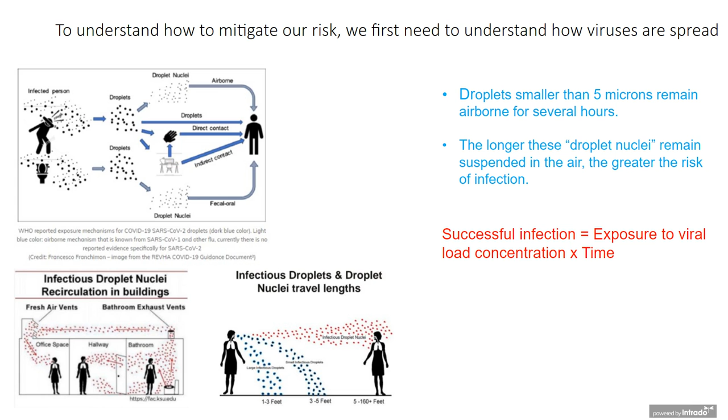So furthermore, how do we address PM2.5? We need to understand the importance of it. We started with the virus, now we have to talk about PM2.5.

As I mentioned, the virus itself is between 5 micron down to 0.125 micron in size. Just to give you a snapshot of what that means, human hair is about 50 to 70 micron in size, and beach sand is about 90 micron.

PM2.5 is indeed the unseen dangers. These are particles we can't see, but they present significant inhalation effects and attribute to chronic disease such as asthma, heart attacks, bronchitis, and respiratory problems. Those with underlying conditions have a bigger impact from it. Somebody who has asthma or an elderly person dealing with respiratory issues already will be affected much more severely by PM2.5 than a healthy individual.

Furthermore, exposure to PM2.5 itself has been linked to higher COVID-19 infection and mortality rates, right off of the NIH website. So again, we have to address the air we breathe holistically. From the virus standpoint, which goes far beyond COVID-19, we're looking at influenza, bacteria, mold, fungus spores. There's a lot going on in the air, and it has to be addressed.

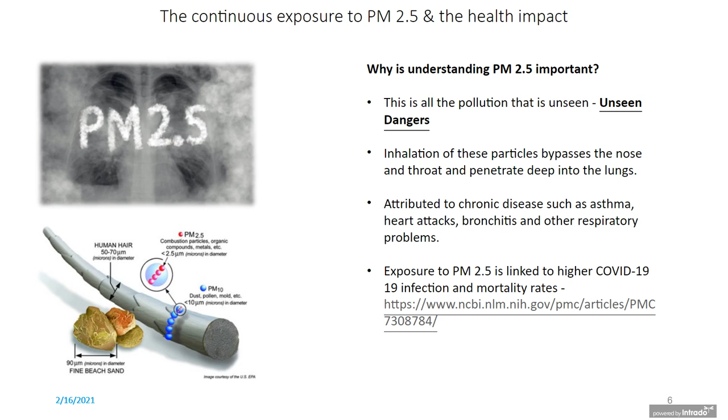So what I want to talk about is really the global burden of disease and how it attributes to indoor air pollution. Studies performed well before this pandemic, back in 2015, directly linked the global burden of disease to ambient air pollution, both outdoors and indoors.

And then during the pandemic, which we're still in, Dr. Chan from Harvard wrote an article linking air pollution to higher COVID-19 death rates. We have to look at the facts. We look at New York as being the epicenter. Why? A lot of different reasons, but one of them is the air they breathe, both outdoors and indoors, is extremely polluted. And you don't know it.

You could be a healthy individual, exercising every day, going out for a run or a bike ride, but you're only as healthy as the air you breathe. So if you're getting in contact with this PM2.5 consistently, the cumulative effects of that exposure will degrade your health over time. In fact, over 7 million people die prematurely every year from air pollution, both household and outdoor.

Of that 7 million, 300,000 is right here in the United States. So this isn't just a third world problem. It's a problem that exists right here in our backyard.

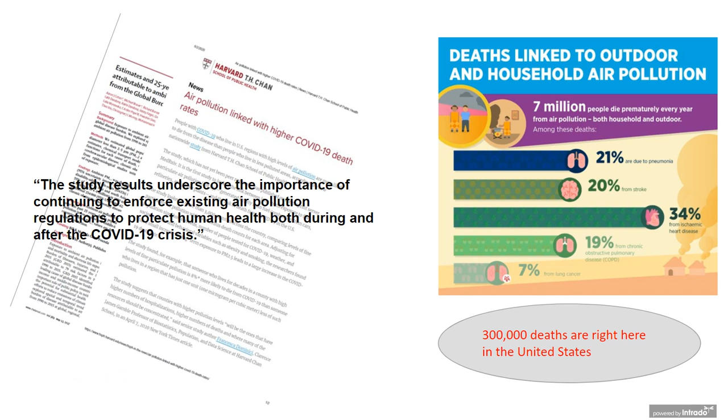So let's go over some of the CDC and ASHRAE guidelines for engineering controls to improve indoor air quality, as we know it's a concern for many on the call today. Per the CDC, they want to optimize air handling systems to ensure appropriate directional airflow patterns, appropriate filtration integrated into the ventilation system, and appropriate air exchange rates—the amount of times outdoor air comes in and is processed out continuously.

They also want to consider the addition of portable HEPA filtered units to supplement the existing HVAC system. As per ASHRAE, they too want to operate HVAC and improve ventilation, but they want the HVAC operated 24/7, and the outside air increased to as close to 100% as possible.

Sometimes this is not achievable. They also want an upgrade to MERV 13 filters. There are filters placed inside the ventilation system that filter out pollutants from inside and from the outside air. So they want those upgraded to MERV 13 filters, and I'll get into MERV rated filters further down in the presentation.

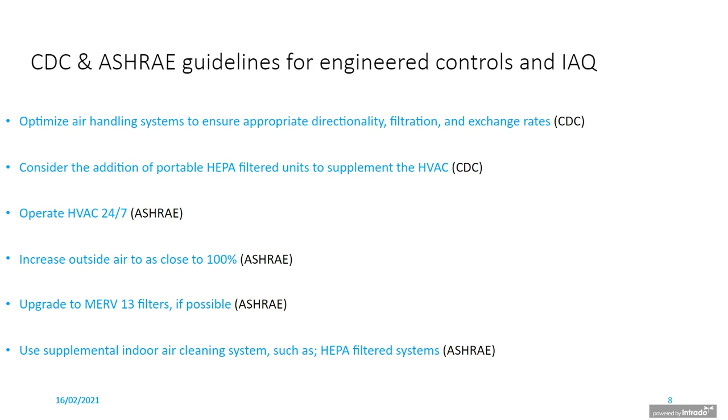ASHRAE also wants to use supplemental indoor cleaning systems such as HEPA filtered systems as well.

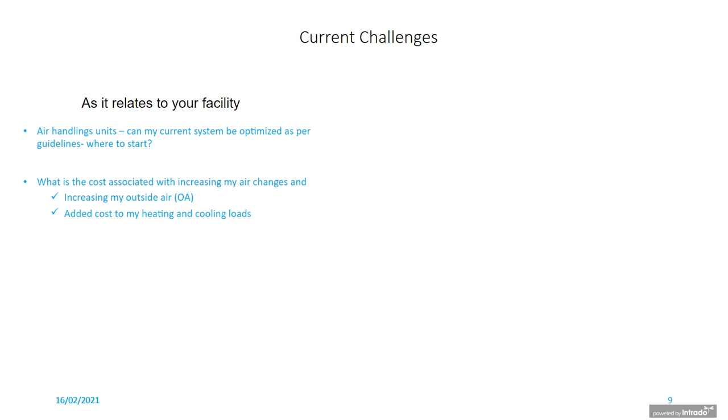There's a lot of impact involved in all of these recommendations as it relates to your facility's air handling units. How can you optimize it per the guidelines, and where do you start? It's very challenging. What is the cost associated with increasing my air changes and increasing my outside air, and what is the added cost to my heating and cooling loads? Also, what is the impact as it relates to relative humidity? All this is impacted as we increase air changes and add upgrades to filtered systems. We have additional pressure drops on the unit itself, so we have higher load factors.

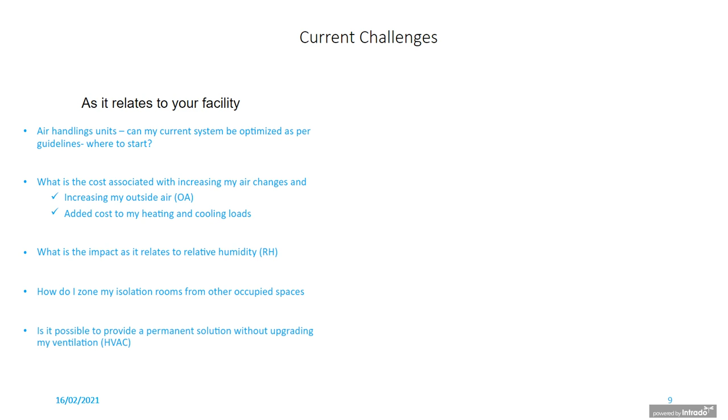How do I zone my isolation rooms from other occupied spaces? I say that because a lot of these ventilation systems are centralized. So if you have an isolation room with a positive COVID-19 patient, and your ventilation system is centralized, those pathogens are going up into the return vent through the HVAC and potentially re-entrained to other places within the facility, other supply vents, another room, or the corridor. So we have to figure out how to isolate these rooms, and how to provide a solution without upgrading the ventilation system. Is that even possible, and what technologies are available to do so?

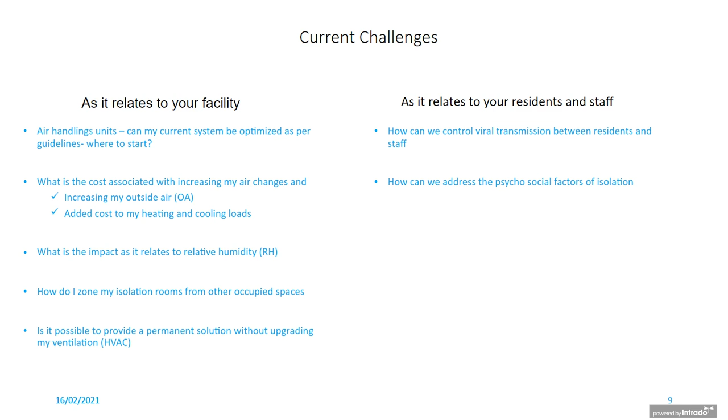As it relates to residents and staff, how can we control viral transmission between them? That's key—we want to maintain a safe environment, as safe as possible. How can we address the psychosocial factors of isolation? This is a major concern we've seen working with long-term care facilities. When someone is in isolation, how do we reduce the pain they're experiencing? Are we able to open the doorways so they can at least see outside into the hallway, and if so, how do we ensure we're not exposing those outside? There's a lot to consider regarding the residents.

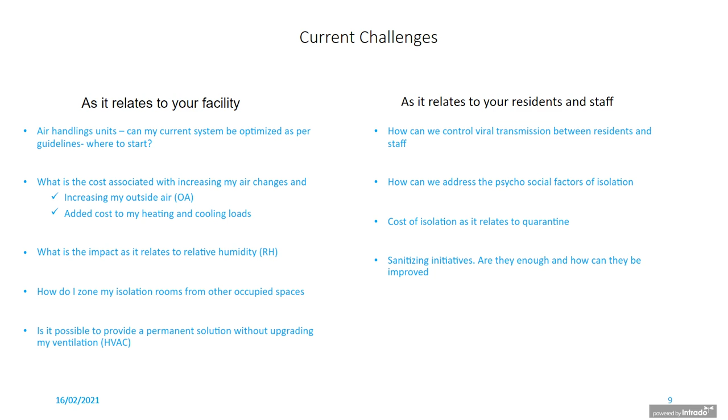Then there's the cost of isolation as it relates to quarantine. Based on information from the facilities we're working with, it's on average between $200 to $500 a day per resident in isolation—and that's just gloves, gowns, disinfection, things of that nature. So what is the cost of isolation, and can it potentially be reduced? Are my sanitization initiatives enough, and how can they be improved? A lot of things to consider there.

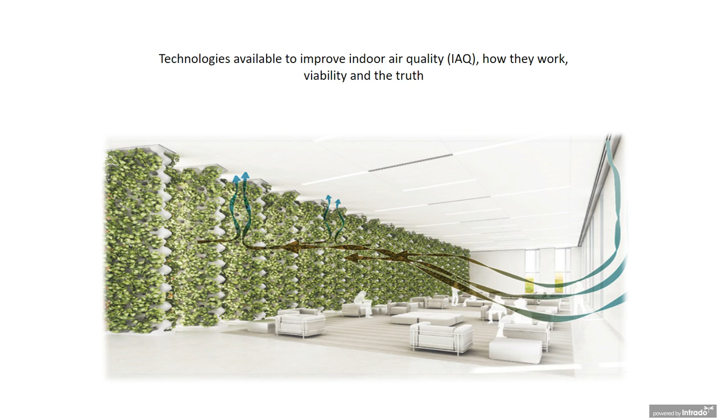So what I want to go over is the technologies available to improve indoor air quality, how they work, the viability behind all these different technologies, and the truth. We'll get into some quantitative results and performance criteria of some of these products later on in the presentation.

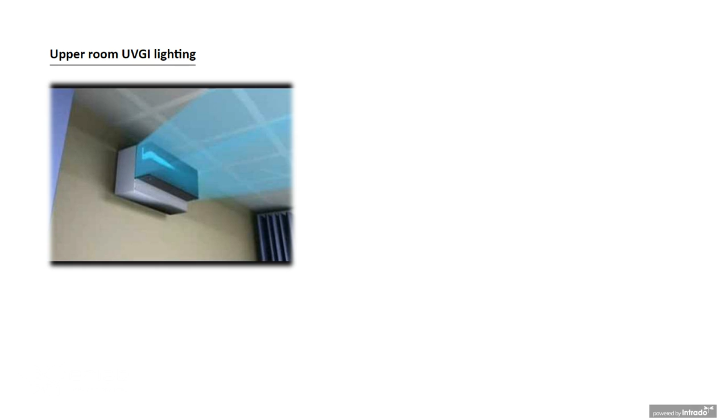The first technology I want to discuss is upper room UVGI lighting. Traditionally, this has been used in tuberculosis isolation rooms where you have proper directional airflow patterns. Upper room UVGI is extremely effective, but you must ensure effective room distribution patterns and proper residency time within the irradiated zones. Total dose required is based on the specific microorganisms to be inactivated, and again, the directional airflow patterns—if you don't have proper upstream airflow, how are we getting the pathogens to this upper room UVGI? So there's a lot to look at when deciding which technologies to integrate into your facility. There's additional information on this link, available when you download the presentation.

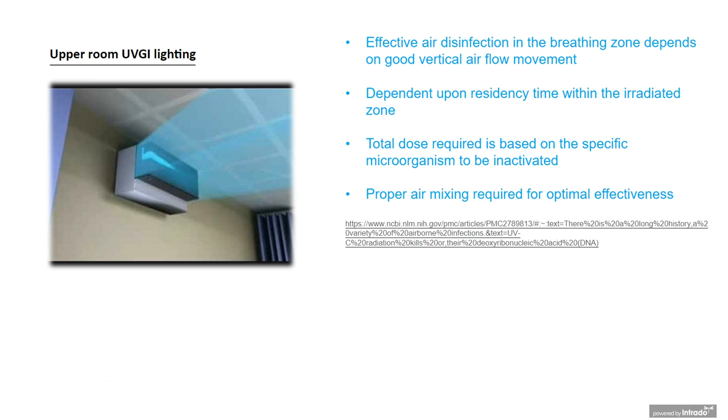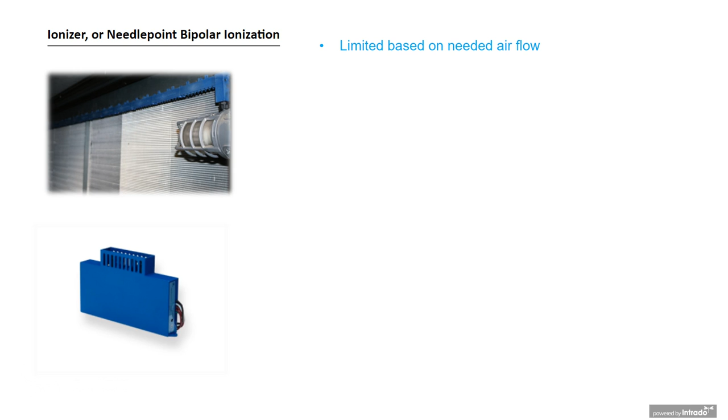The next technology is ionizers, or needlepoint bipolar ionization. This is a product that works—it is effective, but it's limited based on needed airflow. What you see here on the left of this slide, this blue bar going across the air handling unit, shows how these needlepoint bipolar ionization systems typically sit at the air handling unit. It's based on how effective we are at pushing air past these ionizers to drive the ions down through the HVAC system and eventually to the rooms. However, the problem is density factors—the further away the ion gets from the generator itself, the less effective it becomes.

The ions have a kill rate which ranges between 30 and 60 minutes. So if you're not getting the ion to the source of the problem quickly and efficiently, by the time it gets to the source, you then have a 30 to 60 minute time frame before it actually kills a pathogen. But ions, when they're generated, have a lifespan of 60 seconds. So it's all about how do we get those ions to the air.

They work if they're at the air handling units and you're looking to provide a solution within the HVAC system, or to decontaminate the filters themselves. They do have value if you understand why you're implementing them and know exactly what the needs of these ions are. They're not going to provide room level mitigation installed in the HVAC system. Also, some do generate ozone.

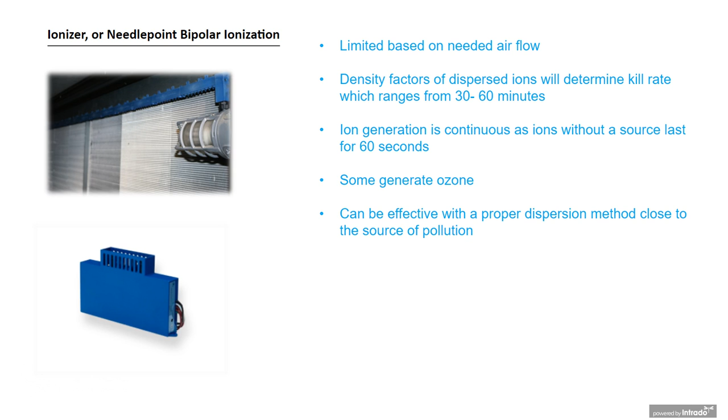So to recap, it is effective within the HVAC system. It will decontaminate the filters within the ventilation system as well. But if it doesn't have an effective source for proper dispersion methods, it's not going to provide you room level mitigation, and we really want to address the room.

Within this ventilation or air handling unit, that's where you have the filters. You have a filter to filter the outside air, and then a filter to filter the return air. If you don't have the proper filter - now MERV 13 is what's required by ASHRAE, because it has an efficiency rating of 75% to particles down to 0.3 micron. If you have less than that, those pathogens are going to fly right through the filter and be released into the supply air. That's why the upgrade to the filter is critical and part of the recommendation for CDC and ASHRAE.

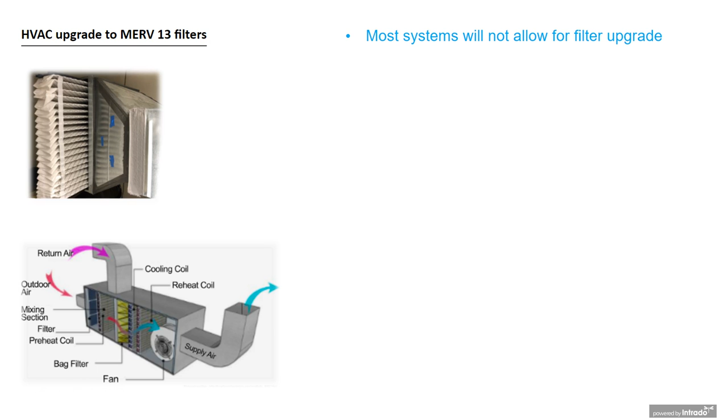Now, most systems will not allow for a filter upgrade. If you put a more robust filter in a system that was rated for, say, a MERV 7 filter, it's not going to be able to handle the pressure drop when adding a more heavily pleated filter such as a MERV 13. So we have to factor that into our plans. And if upgraded, what is the impact to the heating and cooling loads?

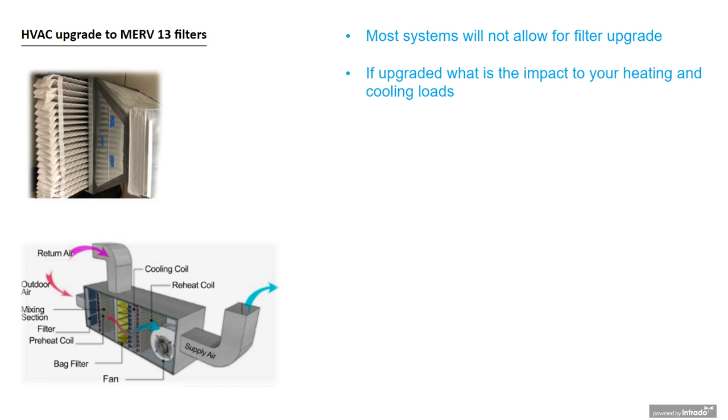So Merv 13 filters - as I mentioned earlier, they're about 75% efficient at capturing viral particles as small as 0.125 microns. 75% is not great, but it's not horrible. If we look at a Merv 7 filter, the standard filter usually within facilities and how an HVAC is designed, you have less than 20% efficiency at microns smaller than 0.3. As you get larger in micron size, it becomes more efficient, obviously because the particle itself is larger.

But then we have to get into HEPA filters. HEPA filters start at Merv 17 and above - that's when we become 99.995% efficient and greater. So basically, the higher the Merv rated filter, the more efficient it is at capturing particles between 0.1 micron and 1 micron in size, and that's the danger zone.

But again, just like the UV upper room UVGI, or the needlepoint bipolar ionization, this does not address room level mitigation. If it's centralized and we don't have the proper filter in the system, those viruses could potentially be dispersed right back into the supply.

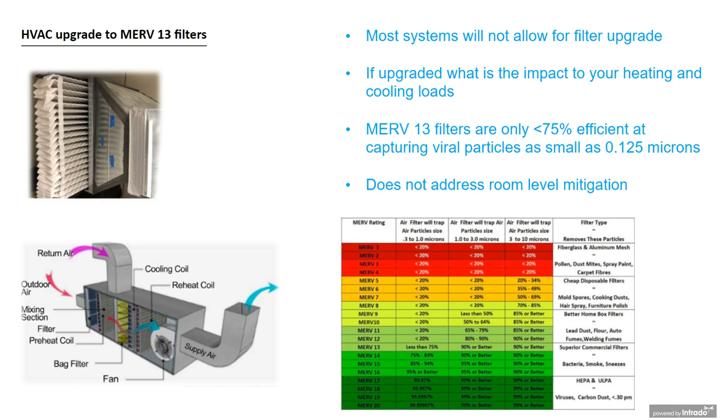The next technology I want to mention is floor-mounted units. These are a very affordable system to integrate into your building - it plugs in, but there's a lot wrong with these systems. They're meant for residential use. Now remember how I mentioned the virus remains in the air for up to 16 hours, right within the breathing zone.

Floor-mounted systems do a couple things: they create ground disruption and air turbulence, and a very unpredictable airflow pattern, which increases the chance of exposure because it takes the air, drives it down past the breathing zone, creates a very turbulent environment, which can further desiccate any droplets that may have landed on the surface, and just creates an environment that's full of infectious droplet nuclei.

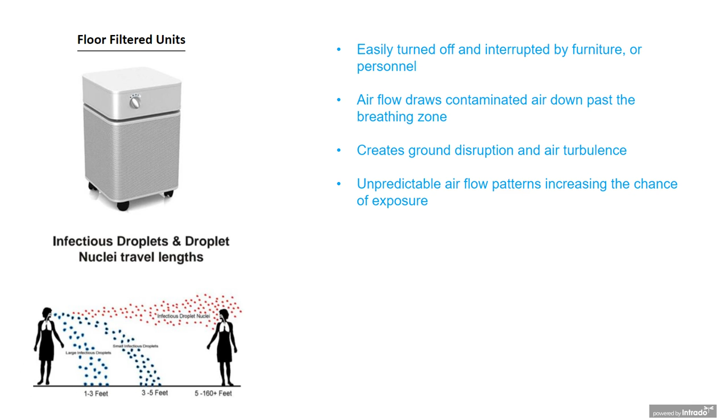When it captures those droplet nuclei in the filtered system, depending on the filter, it may capture them efficiently. But that's far beyond the filter. We have to understand ventilation effectiveness, the way the air is processed, and the patterns of airflow. So it's by far not the best solution for a commercial use space.

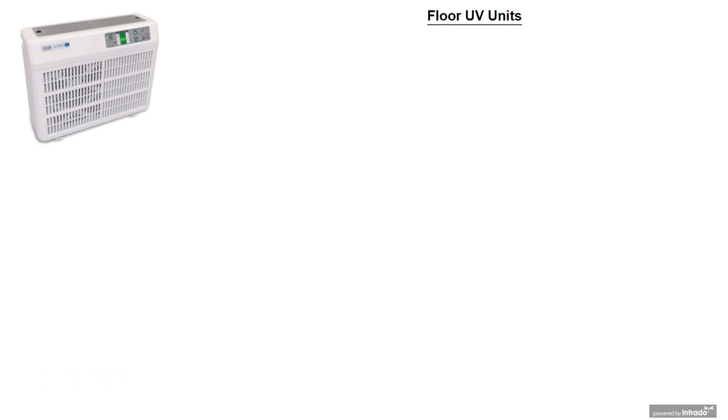And floor UV units—yes, there are a lot of different technologies out there, but that's what's available, and I want to make sure we educate on all of these different technologies. These floor UV units can easily be turned off and interrupted by furniture or personnel, just like a floor filtered unit. The airflow draws contaminated air down past the breathing zone.

It creates ground turbulence, inadequate distribution, and very unpredictable airflow patterns. Now, with UV lighting, just like ionizers and upper room UVGI, there is a total dosage factor that needs to be equated to reduce the pathogen load. If we're drawing a tremendous amount of air through these systems—cubic feet per minute—there's not going to be enough residency time for that pathogen to be exposed to the UV light for it to be deemed effective.

Simply put, there's just not enough exposure. The WHO advises against the use of these products, and the inefficiencies have been recognized. In fact, there was a $6 million investment made at the Sacramento City Unified School District for 480 of these units without investigating the efficacy and performance of the product. Now the school committee, the teachers' unions, everyone involved is looking to return the product because they were sold something that really wasn't going to provide them the right solution. That's unfortunate—it's unsettling to know this is occurring, but it is. So we have to be aware and very educated about what is available on the market.

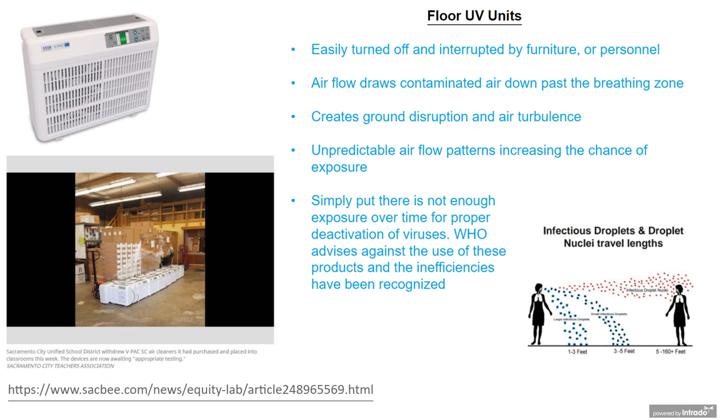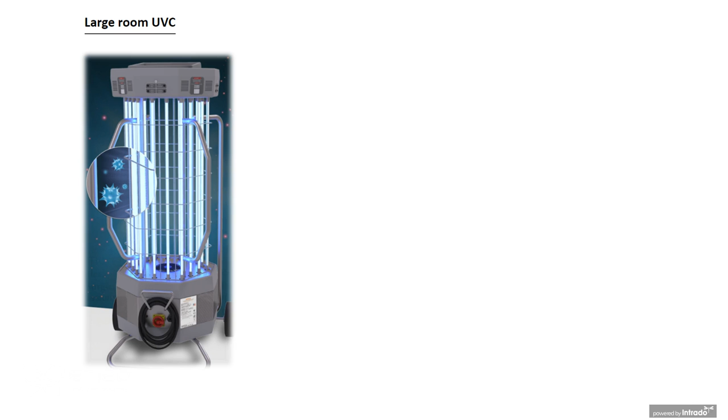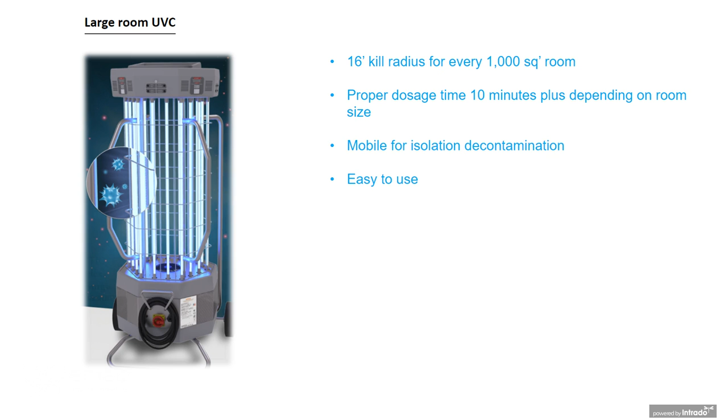Now, this piece of equipment, large room UVC, maybe you've seen these as robots. iRobot has partnered with a company that takes these units to an unoccupied space and delivers UV continuously, providing a 16-foot kill radius for every 1,000 square foot room. It's a great solution for unoccupied spaces. It does provide the proper dosage time to deactivate any pathogens present in that room, and it's easy to use. But again, it's effective and a great solution only when a facility or room is unoccupied.

You cannot use a system like this in an occupied room—we cannot be exposed to these UV wavelengths. So it's extremely effective, but it's not going to address the air, and it's certainly not going to address the pollution factor in the room itself when you have an occupied resident, or in general operating spaces.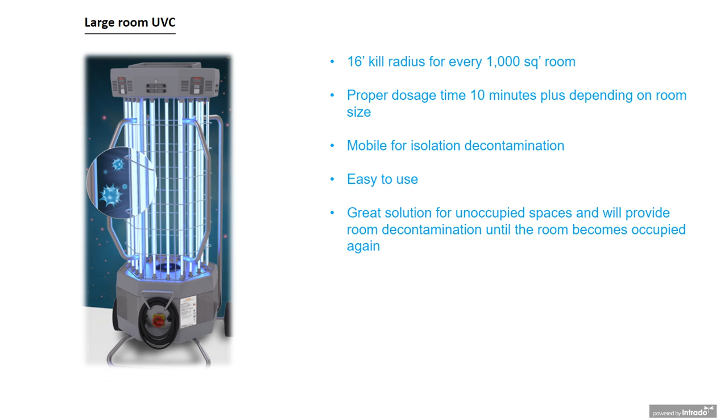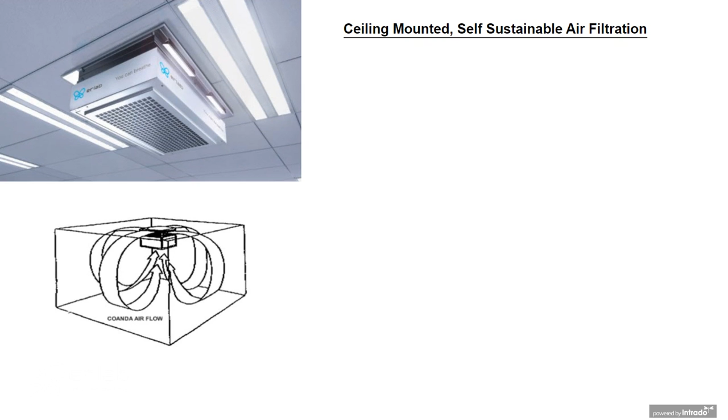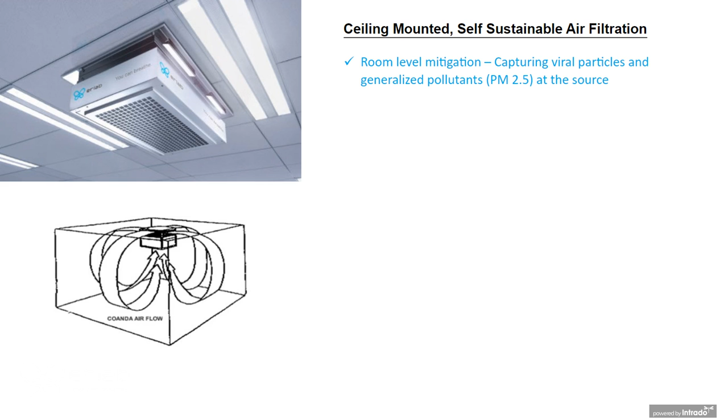Then there are ceiling-mounted, self-sustainable air filtration systems that are not integrated into the HVAC system—they just process the air. These provide room-level mitigation. They capture viral particles and generalized pollution, PM2.5, at the source, and they draw air up and away from the breathing zone of the occupant, which is extremely critical.

When they disperse the air, they drive it up vertically and disperse it horizontally, creating what's known as a Coanda airflow effect. As you see in this diagram, it basically creates an airflow curtain, ensuring that all the polluted air that's down and around is taken up and away from the breathing zone, continuously moving the air.

In addition, when properly outfitted—depending on the room size, which will determine, like all of these products I mentioned, how many units are required—depending on the room size and the number of units installed, it will add an additional 3 air change rates per hour, again without upgrading the building's ventilation system.

It also can improve room mixing, or what's known as ventilation effectiveness, VEF. When you have proper room mixing, you have a very adequate airflow system designed to mitigate any problems present, whether pollution, viral, or non-viral, within the room or facility. There's further research showing a log reduction of greater than 90% of viruses within 15 minutes.

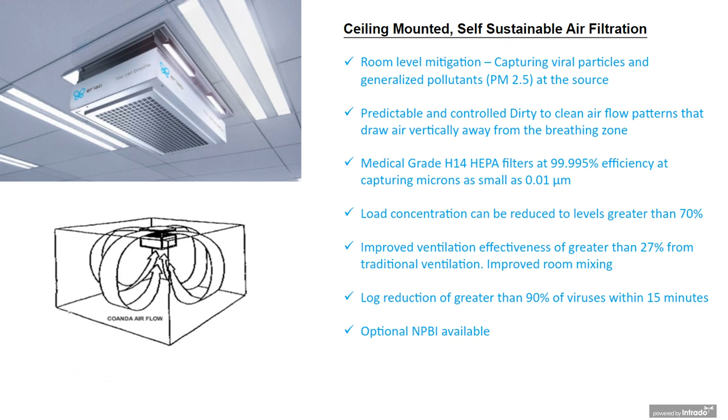Now, you remember I mentioned needlepoint bipolar ionization earlier. It works if you have the proper dispersion. So these systems do have optional needlepoint bipolar ionization installed within the cavity chamber between the filter and the fan, constantly dispersing negatively and positively charged ions while filtering at the same time. This becomes extremely efficient.

Now, how can these technologies work together, and when does it make sense? Let's try to wrap our heads around all these different technologies, and let's understand first and foremost how do we address the room when occupied.

A couple of solutions: the ceiling-mounted system with needlepoint bipolar ionization combined, or upper room UVGI if you already have proper airflow distribution. Those are room-level mitigation solutions, and of course there's the UVC robot, for when the room is unoccupied.

And what's going to provide you with dirty to clean air distribution patterns, taking the dirty air up and away from the breathing zone? A proper ceiling-mounted filtered system provides very predictable airflow patterns and increases ventilation effectiveness. Ventilation systems will do this as well, if designed appropriately.

We're assuming that your ventilation system may not be able to be upgraded, because that seems to be what we're coming across more and more every day. It can also increase air change rates — both the ceiling-mounted system as well as an upgrade to the ventilation system.

But then we have to look at what decontaminates and what deactivates. Ionizers can deactivate, UVGI can decontaminate and deactivate, and so can a robot UV system. You can also deactivate with ionization integrated into the ceiling-mounted system.

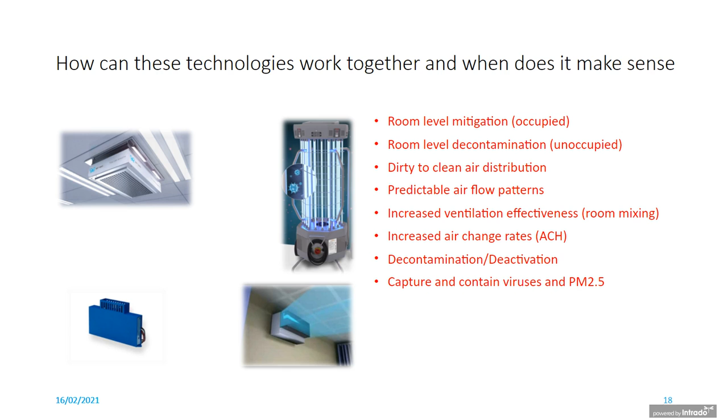So once they're captured, it's not like when the filter's changed you're going to be released with these pathogens. They will cease to exist, and they'll just remain a particle on the surface of the HEPA filter itself.

So now we want to review efficacy studies and true quantitative results, which is critical. We need to know that the solutions we're integrating into our facility are going to work. There has to be studies behind the technology to prove its efficiency and effectiveness. Otherwise, we're going to make investments like the Sacramento School District and others, and unfortunately be stuck in a very bad situation where we don't have a true adequate solution.

So I'm going to go over some efficacy studies: pre-validations of particle counts in a controlled challenge test atmosphere and in uncontrolled real-world conditions, then post-validation of particles — what we've seen in regards to reduction of particles after the technology is integrated. Then we're going to look at real-world data and sample collection of actual SARS-CoV-2 using polymer chain reaction, or PCR, in an active COVID-19 patient's room where we ran A/B testing.

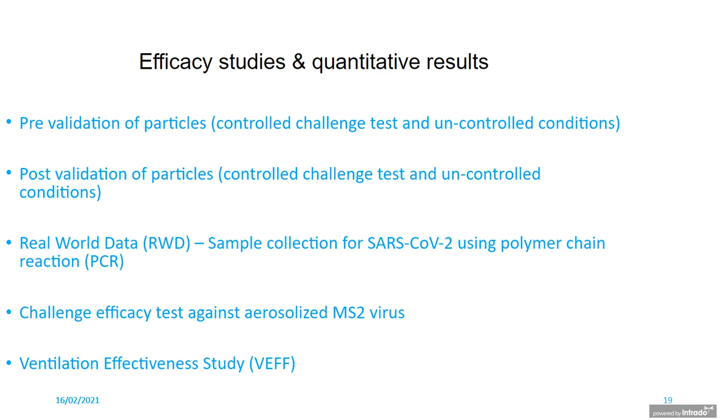And then we're going to go over some challenge efficacy tests against aerosolized MS2 viruses. MS2 is used as a surrogate virus for influenza and now has also been approved for COVID-19. Then we want to look at the overall testing and efficacy of the improvement of ventilation effectiveness, to ensure we are mixing the room adequately and the air is being processed effectively.

These first graphs show you — the one on the left actually shows a real-world scenario in an office space where we wanted to take particle counts when the room itself was active. It's about a 2,700 cubic foot room, and we wanted to take a baseline of the particle counts before. Now this is just particles, these aren't viruses. We took a baseline before, and then a baseline after a ceiling-mounted system was installed.

And what we saw with the baseline before, at the particles that really matter, between 0.3 and 0.5 micron, we saw 896 million versus 253 million. So we saw a up to 74% reduction across the board on the smaller particles.

Then you want to test the overall log reduction in the viability and efficacy of a system when it's put in a controlled chamber and you inundate it with a pathogen or an MS2 virus. You want to see how long it takes to actually start getting a log reduction, and over the time of the testing, when do you achieve a 4-log reduction, which is a 99.99% reduction of pathogens.

This test showed that during the baseline test, and then after we ran 3 individual tests thereafter, there was a log reduction of an average of 1 within 15 minutes, and then decreased significantly from there. After the test, within 90 minutes, there was an average of a 4.99 log reduction.

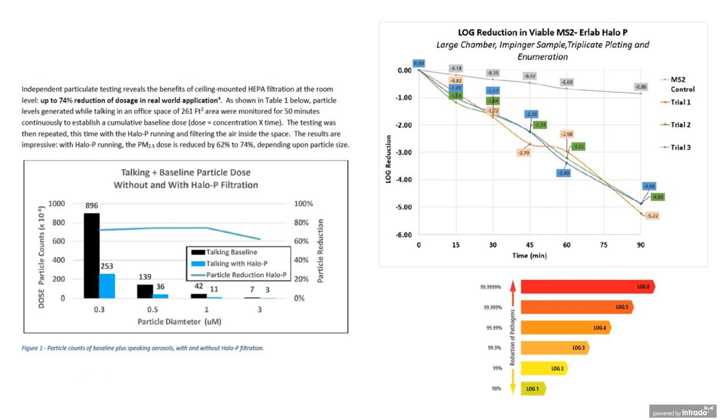A challenge test, not real-world settings, but it absolutely is a challenge test where this chamber literally gets dosed with MS2. So you have to look at the overall effectiveness of that. It doesn't tell the whole story, however.

Well, what we saw here was a general log reduction of greater than 80% across the board, from 1 micron down to 0.3 micron. That is a significant reduction. Now, this was a 186,000 cubic foot warehouse space with 8 systems installed.

Now, when I mentioned technologies working together, we did work with the ventilation system here as the systems were installed near the return registers. Remember, we have return and supplies, so the air that's being sucked up, we were working with that air, those CFM, that air volume, and we installed the ceiling-mounted system working with that CFM, and we were able to control the airflow patterns and drastically reduce the particle counts.

Now, these are particles. Again, we're talking viruses and particles. Particles are critical. PM2.5 drastically reduced, and that's what we want to look at.

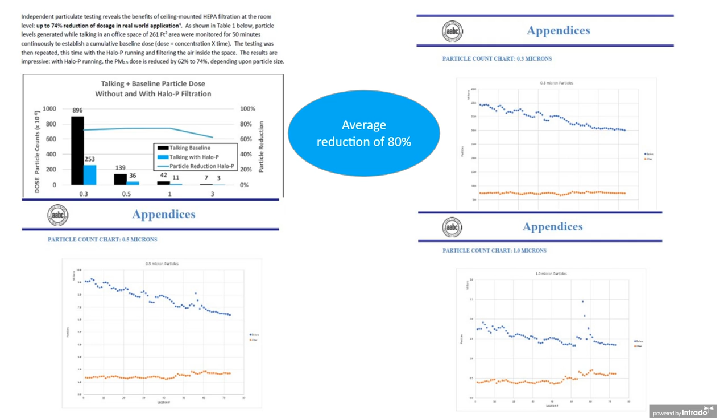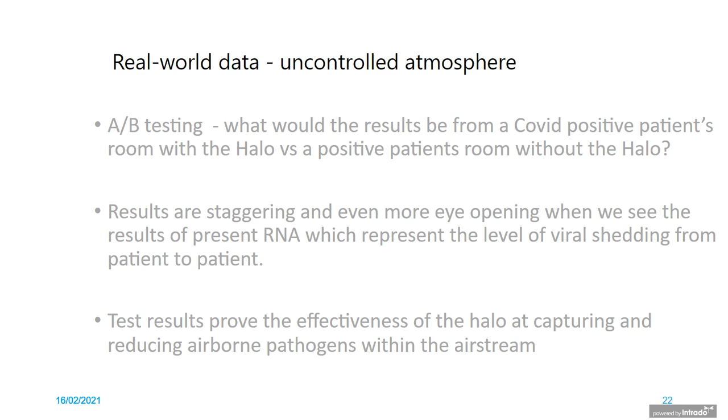The additional real-world data in another uncontrolled atmosphere is where we ran A/B testing. We wanted to know what the results would be from a COVID-19 positive patient's room with a halo versus a positive patient's room without the halo. The results we saw were staggering. I'll go over those results.

Patient in room 120 was just at the start of their quarantine. Patient in room 118 was towards the end of the quarantine. We know a couple of things. Based on the fact that this patient in room 120 was at the start of the quarantine, they were shedding a significant amount of viruses.

We know that because we took swab samples at the foot of the bed, at the window shelf, and we wanted to see the positive RNA copies. We're looking at N1 and N2 positive proteins. At the floor, we saw 23,000 copies. I mean, this patient was shedding a massive amount of viruses. We saw 820 at the window shelf.

In room 118, the patient was at the end of the quarantine, so the viral shedding was minimal. We saw 3,500 copies at the register. We did not see any at the floor or the window shelf.

A couple things. We know this patient in room 120 was shedding virus. We know this patient in 118, if they were shedding virus, it was extremely minimal, and we know they were towards the end of quarantine, so the chances of cleaning and sanitization was high. We didn't get the cleaning logs. This testing was taken at Avamere Healthcare Associates in Boise. But we do know that the patient wasn't shedding a significant amount of virus.

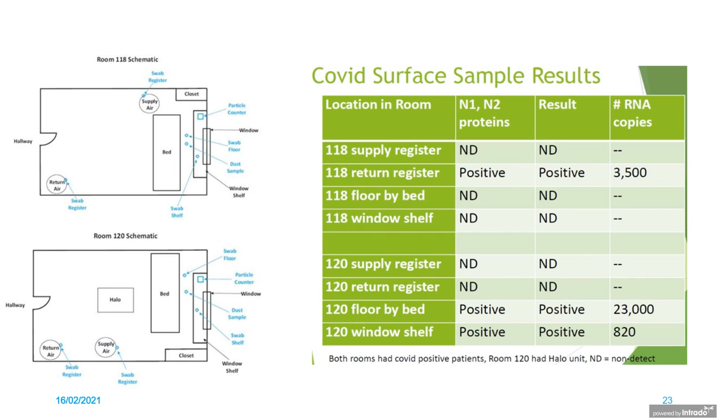There's a lot going on here, and again, it's a very fluid situation. It's critical to understand what needs to be done to address all of these issues, the cumulative effects, and the impact on the residents, the staff, and the family members.

In summary, we look at solutions that deal with today's issues but also look forward to tomorrow's challenges. And what are tomorrow's challenges? We're well aware there's a vaccine available and people are getting inoculated rapidly, but there's also mutation occurring. There are a lot of variants of this disease happening frequently. How long will this vaccine last? Will it be effective against the next variant? And what happens when the next virus comes?

Unfortunately, there will be more coronavirus that occurs. A doctor at the University of Texas Children's Hospital said, rest assured, this is not the last we see of a mutated coronavirus. We have to learn the lessons we've been given from this pandemic. We don't want to be put in this situation again.

So again, when I say we have to address today but also look at tomorrow's challenges, it's everything I just mentioned, but also the general pollution that we really weren't addressing before this.

We also learned that filtration, when used appropriately, provides significant impact to overall ventilation effectiveness and reduces PM2.5 and overall viral load. What we don't know is the exact amount of viral load that will impact an individual - that varies. We don't know the amount of viral load needed to be exposed to in order to be infected by this virus, or any virus really. All we know is if we reduce viral load concentrations, the chances of infection decrease.